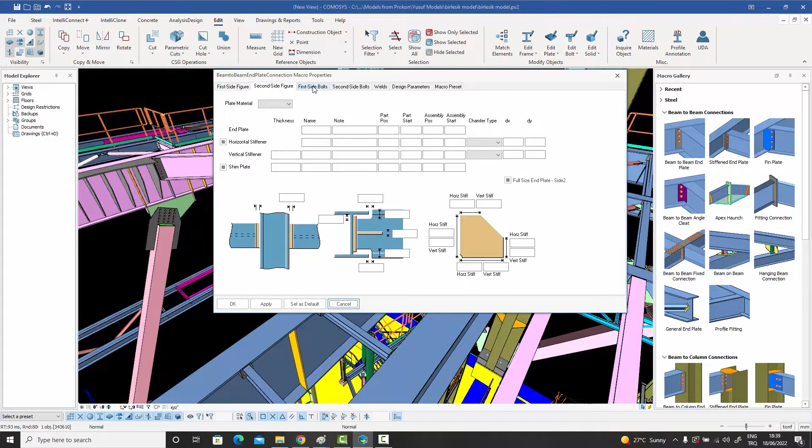But then there are other things which are not related to analysis only, but they're related to geometric properties of the elements which are being connected. So, for example, if it was a bolted gusset connection, then the angle gauge distances would need to be entered. Similarly, the tolerance or the distance between the bolts would depend on the diameter of the bolt.

So it's very common, for example, to use interbolt distance in the direction of the load to be around 3D. So if the diameter of the bolt is about 20 millimeters, then typically you would use this to be 60. But if the diameter falls to 16, then you would perhaps use something like 50. So you enter a lot of bolt distance related parameters, and then the bolt tolerances, for example, or the assembly which you need to choose.

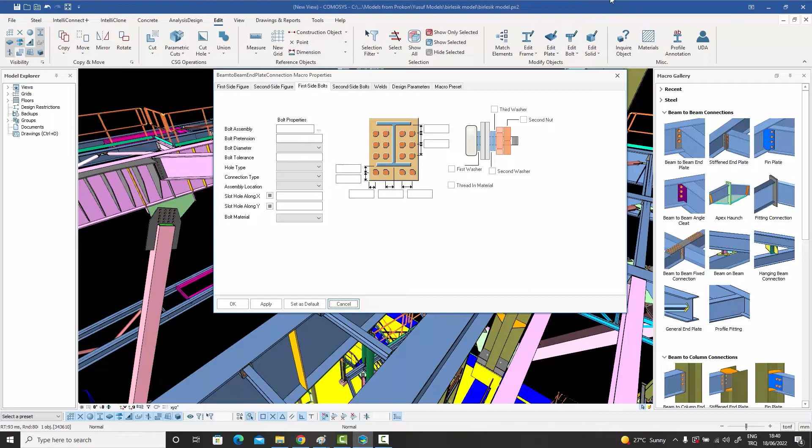These things are not directly related to the analysis, but are related to geometric properties of the elements which are being connected. So the project preferences file is a file which saves you a lot of time, because what you can do is you can save away these defaults, if you will, in the file, and then you can go ahead and use your macros without really entering much information.

So to explain a bit further, what I will need to do is actually take you through the project preferences file, and then you will realize better what kind of benefits I'm talking about. So let's go to the project preferences file, and it's located under the file menu. And if you go down over here, you see this menu item called project preferences. And if I click on that, it'll open up the project preferences file.

And the first thing which I want to mention is that there are lots of parameters over here, and we will go through the important ones. But what I need to say at the outset is that after having set all the parameters, you can give all these parameters a preset name, and the file will be saved away with a different name. And then in different projects, you can recall different project preferences files.

So just like the normal presets which we have in COMOSYS in every command, the defaults of every command can be saved away. Similarly, the defaults of your project preferences file can also be given a different name, and you can save them away, and then you can recall them later by using the standard menu over here. You can create a new one, you can save it, etc. Now, I won't go over each and every one of them, because most of them are self-explanatory. But the important ones I do want to go through.

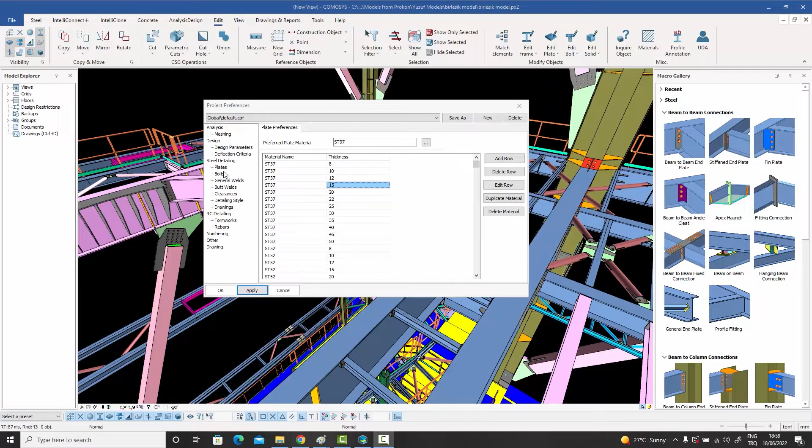Now, after the plates, the next tab over here is the bolts tab, and this is probably the one which is going to save you the maximum amount of time as far as not entering anything in the macros is concerned. So over here, what we have are several parameters on the right-hand side, and these basically tell the macros what to do. So the first thing over there is the preferred bolt material.

So just like with the plates, we didn't enter any material, and it went to the project preferences and got your preferred plate material. Similarly, what you're saying over here is that if I don't enter the bolt material in the macros, then please use this one, this preferred bolt material. But if you notice over here, there are two preferred bolt materials: one is the normal preferred bolt material and one is the preferred high strength bolt material.

So the macros know which particular types of connections will require high strength bolts, and which ones are typically used with normal strength bolts. Although the old 4.6, 5.6 grades are very seldom used, and everybody uses at least an 8.8 grade, even for the normal strength ones. That's become the common practice.

But the idea over here is that you're given two options, and you can enter two default bolt materials. And what that tells COMOSYS is that if I were to leave those fields blank, which is the basic idea, we want you to leave those fields blank. We don't want you filling those names every single time you use the macro. So what you're telling the program is that if I leave those fields blank, then use an 8.8 grade bolt or a 12.9 grade bolt, depending on the situation.

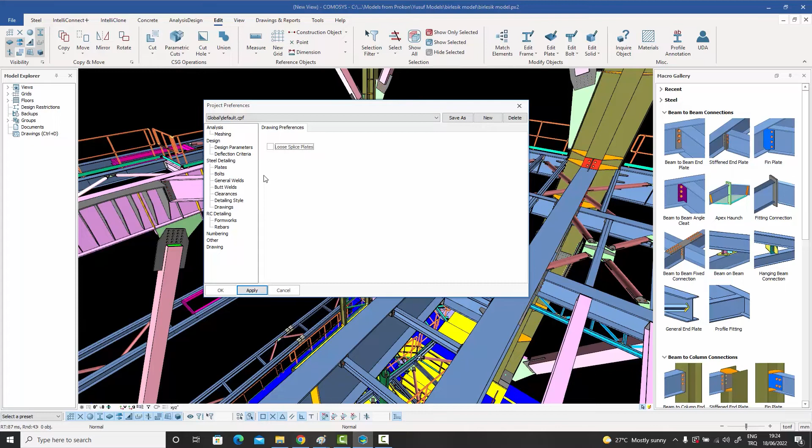So all the things which I've mentioned in the project preferences file, as you must have noticed, are basically to save you from entering a lot of information. All these macros, as we've discussed so many times before, have a lot of things we need to enter. For example, they have thicknesses. These come from analysis. They have bolt distances. They come from the project preferences file.

So the whole idea is not to make you enter these bolts, because the program will tell you that I want to use M20 bolts and 6 of them, but it won't tell you where to place them. And this is where the project preferences file comes in. So the whole idea is to basically leave everything empty and just select the macro and connect.

Now, there's one thing which is not in the project preferences file, but which is very common, and detailers would know this. When you're using angles or when you are bolting to the flanges of I-beams or channels, you cannot place the bolt anywhere you want. So for angles, for instance, there are angle gauge distances. For example, imagine if this was an angle of 80 millimeters, let's say L80 by 8, then you cannot put the bolt exactly in the middle. Let's say this one line of bolt. You cannot put it at 40, which is half of 80.

The distance needs to be read from an angle gauge distances file, and in this case, I know that distance is 45 from the back of the angle. So every single time, what the detailers need to do with other programs is they need to go in there and write 45. And if they don't do that, by default, the programs will put it right in the middle.

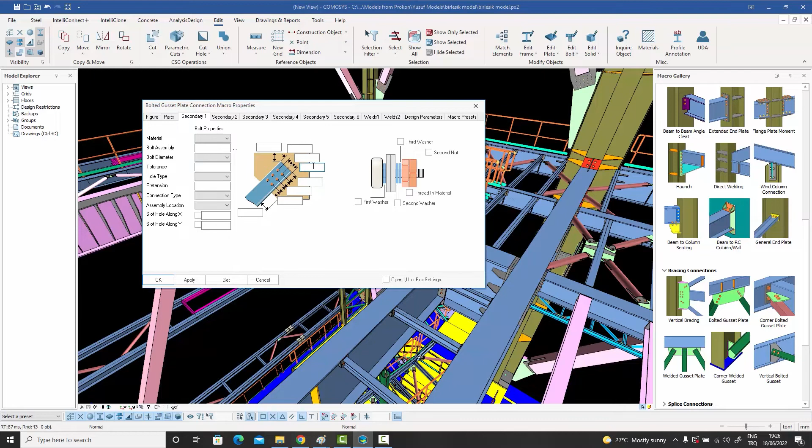Similarly, if you were working, for example, with a haunch connection, where the bolts are bolted to the flange of the column, the location of the bolts cannot be arbitrary in the sense that they need to be at certain distances from the axis of the column, and those distances are defined in the standards.

So these are things which are not available in your project preferences file, but they are available in what we call the preferences directory over here. Let me just quickly talk about it because these topics are connected to each other. The whole idea of having a project preferences file is to not enter anything in the macros when you're using it. And these two bolt distance files are very important, so I want to mention them right now.

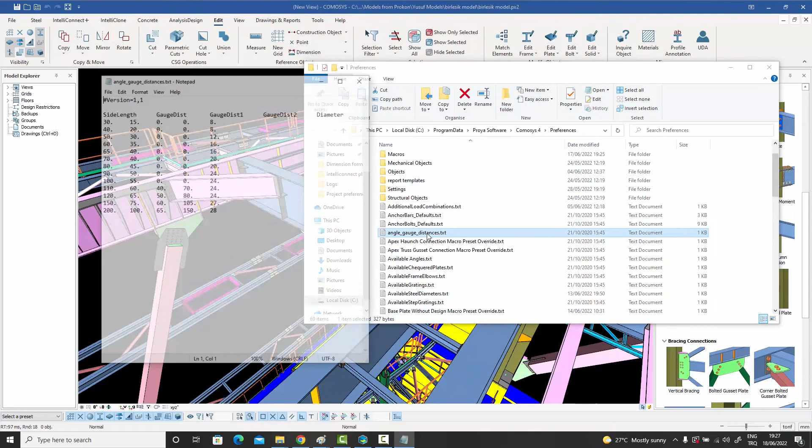So let me go to the preferences directory and scroll slightly down, and you will see this angle gauge distances file. If you double click on that and maximize it, what it tells you is that whenever you see an angle with a leg length of 60, it could even be an unequal legged angle, whatever leg is being bolted, it's the width of that leg. So for a 60 leg width, the bolt angle gauge distance is 35, and the maximum bolt diameter which you can use on this leg is M16.

So you can see from the top over here as well. Similarly, if you're using an L80 angle, for example, the distance from the back of the angle is 45. That's the angle gauge distance. And you can use an M20 bolt. So don't even try an M24 one, for example.

Similarly, for the larger ones, if you cross, say, 110, what you can see is that you have these options over here that if you want to use a single line of bolts, then it should be placed at 60 from the back. But if you're using two lines, so let's say if you're using staggered bolts, then the first line should be at 40 millimeters and the second line should be at 70 millimeters, and the maximum bolt size you can use is 24. Now, you can obviously customize these, but these are pretty much standard globally.

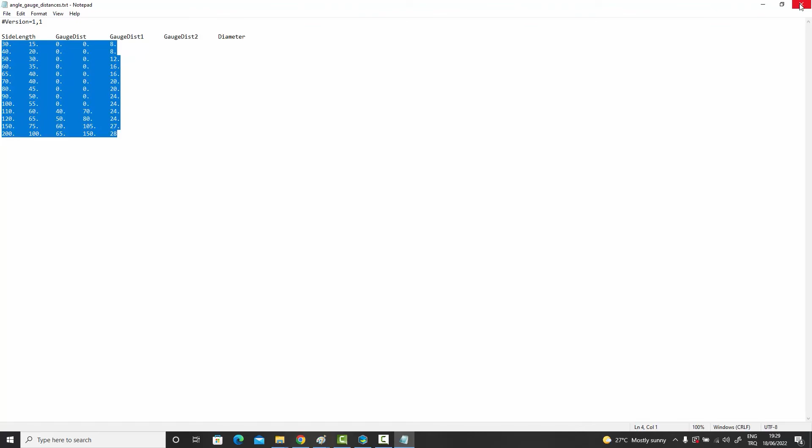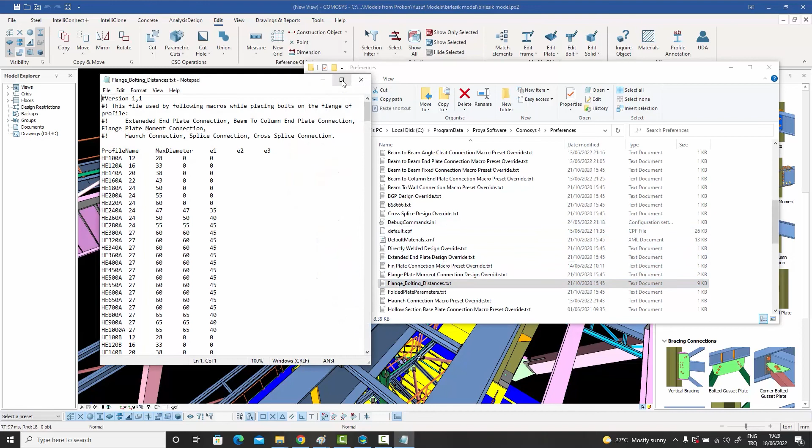But the point I'm trying to make is that by using this angle gauge distances file, you will further allow COMOSYS to work without you having to enter anything in those macros. And similarly, just like there was the angle gauge distances file, there is also the flange bolting distances file. And this one, once again, we have the profile name. And with the profile name, there's the maximum diameter of the bolt you can use and the eccentric E1, E2, E3 values, depending on how wide the flange is.

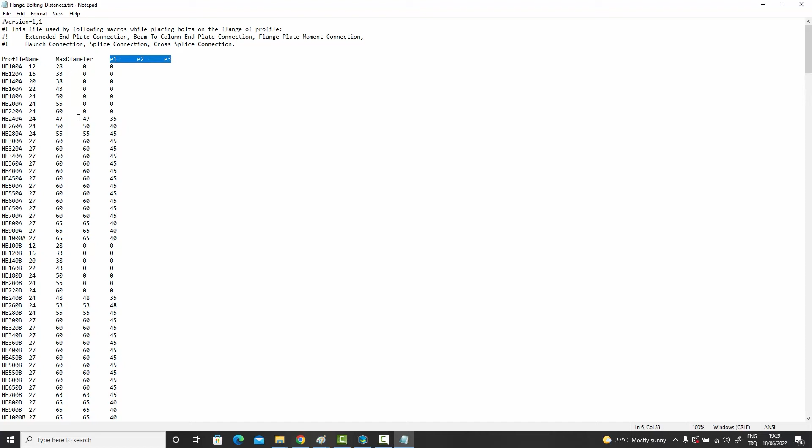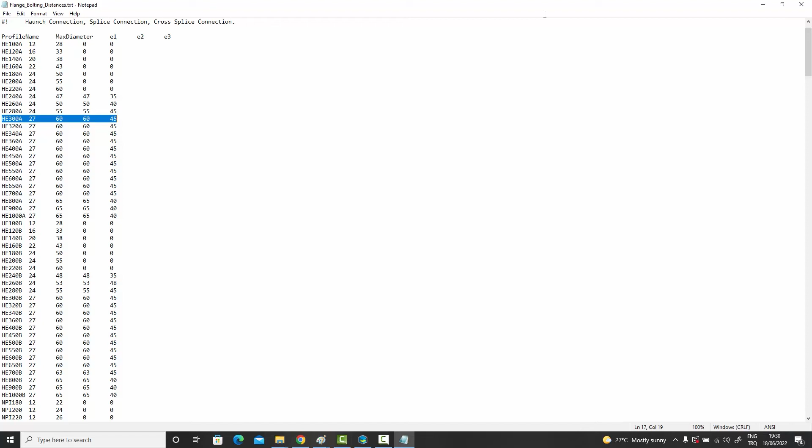So if it's, let's say, an HEA 300, the maximum bolt size it can take is 27. It can take something less than 27, but it can't take an M30 bolt, for example. And this, once again, is for a single line of bolts and for two lines of bolts if needed, staggered. So 60 and 45 are the distances from the mid axis. And like I said, the whole point of these two files is it'll just go and check your profiles. It'll check the profile name. It'll check these distances and it will place the bolt exactly where it needs to be placed.

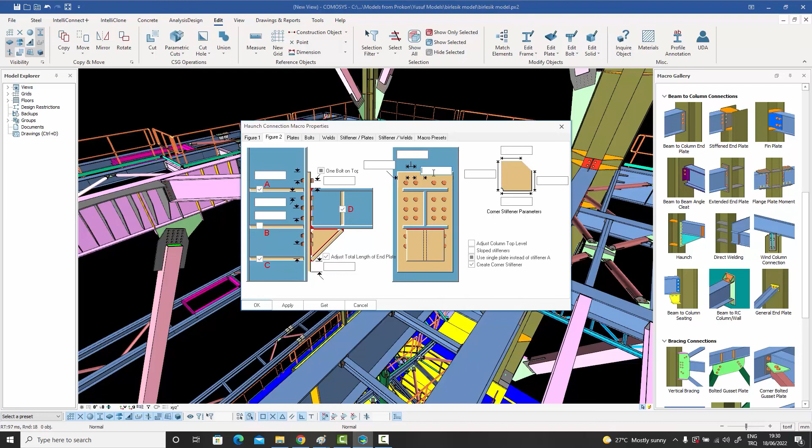So if you're using a haunch connection normally with other programs, you would be forced to go and enter a certain distance over here, because if you don't, then it'll put the first line of bolts at an inappropriate place, and then you would have to remember that distance for the particular section. But with COMOSYS, once you have your project preferences file set up, your angle gauge distances file set up, your flange bolting distances file set up, then you're basically good to go. Half your variables will come from analysis, and the other half will come from these geometric variables which are saved in your project preferences or these gauge distances files.

So the reason why I gave you this brief summary of the project preferences file is because this is one of the ways in which you can really reduce your man hours. It may not sound like it's that important, but believe me, it is. The amount of time you waste on entering these parameters every single time you use a macro can really add up. I always like to say that if you can do something with one click and you can do the same thing in 3 clicks, that's not the difference between 1 click and 3 clicks. That's the difference between 1 month and 3 months, because it's 3 times the amount of time basically if you require more and more clicks.

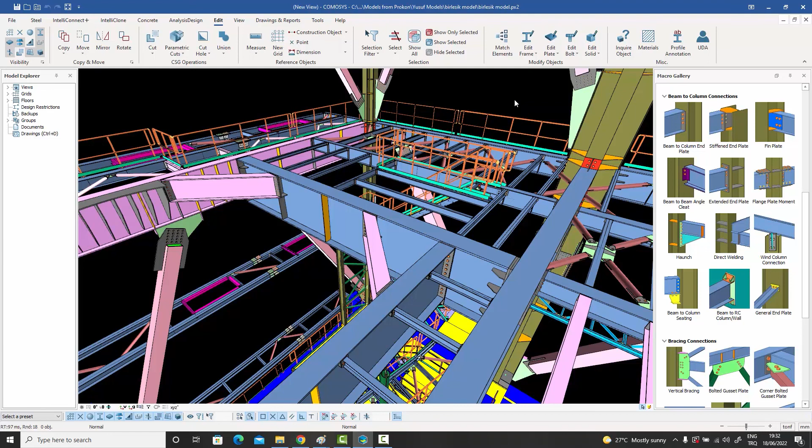And if you need to go and enter all these numbers every single time you're using the macros, that's how it adds up, because you don't use them once, you use them thousands of times again and again. And not only do you end up losing time, you also end up creating an inconsistent model. So my advice would be to please set up this project preferences file immediately when you start using COMOSYS. Set up your angle gauge distances. In all probability, the default values will be fine. But if they're not, and if you want them modified according to your own country, then set them up, and then just forget about all this and start using the program.